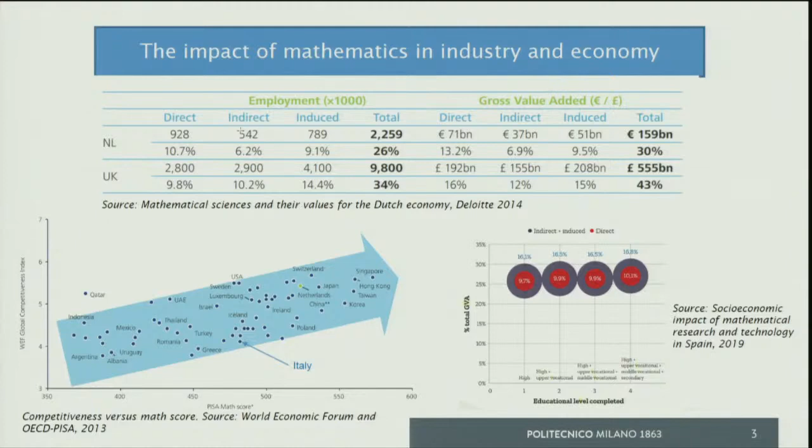You can see that the percentage is quite high. If you look at the total, mathematically induced activity can be responsible for up to 30 or 43% of the gross value added of the country. Similar results you can see in the other table in the lower right, where we have the Spanish findings, and surprisingly, even if Spain is quite different from the UK and the Netherlands, the numbers are more or less comparable to those of the Netherlands, while the UK is a more technological society, and you can see it also in these numbers.

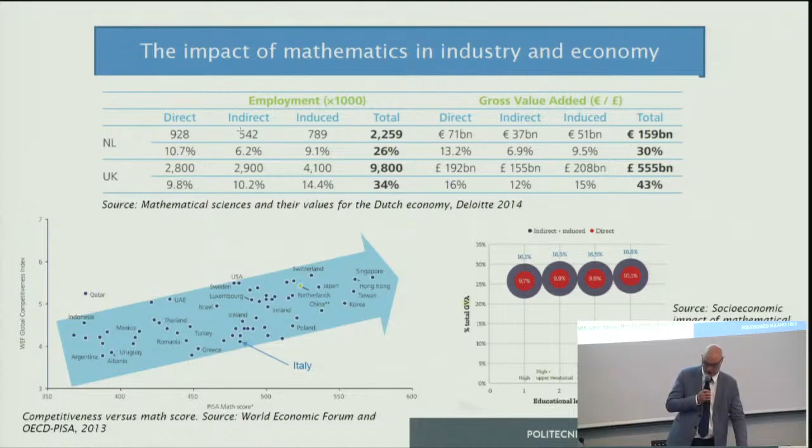On the lower left part, I just wanted to mention the relation between the competitiveness of a country and the knowledge of mathematics, as measured by the OECD's PISA score, in 2013, the year this analysis was made. As you can see, there is quite a reasonable statistical correlation, at least, between the two quantities. Unfortunately, Italy, I put an arrow to indicate where it is, is not very well placed. So this is just to show you that mathematics is of course science, but not only science. It has a very strong impact on the modern economy.

Let's see, in our experience towards industry, which were the main challenges for the numerical modeller we were called to face. I put the main keywords, the main aspects. First of all, multiphysics. Nowadays in industry it is very important to integrate tools that were in the past developed to solve single aspects: structural analysis, fluid dynamics, thermal analysis, or whatever. Now the focus is always on integration, on tackling multiphysics phenomena. Optimization is another very big keyword that we have met in many of our projects.

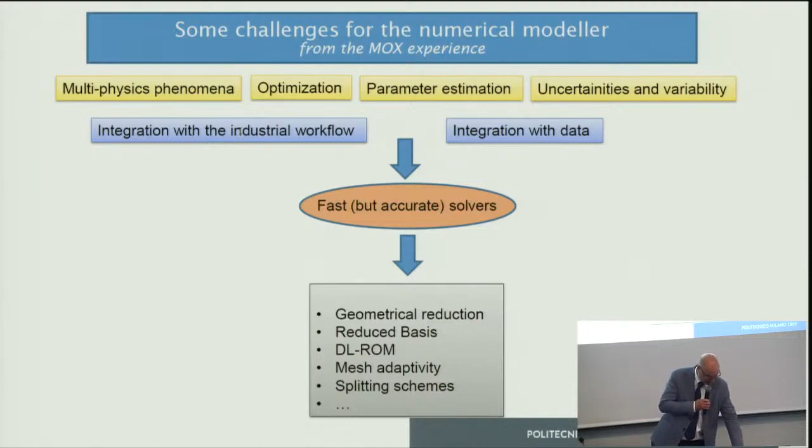It is not only important to develop accurate algorithms, you also need to find a way to perform in a time that is compatible with the industrial workflow. And so here I just show some showcases, as Pier Cesare did before, on some of our projects. This is a work related to energy transition, because we are moving very much to alternative sources of energy.

One is wind. Exploiting wind, offshore wind plants, you need cables to transfer the energy from the turbines to the grid, and we have to face how to build those cables so that the power losses are minimized. That was the industrial objective: find the optimal cable configuration to reduce power losses due to eddy currents and hysteresis.

One possibility is to go to a 3D standard magnetostatic simulation of the cable, but that would require an incredible amount of time if you have to study different processes, different scenarios, or if you want to implement some optimization strategy. So the answer here was a 1D reduced model for the wire and a special integral formulation of the problem, and moreover, exploiting some symmetries of the problem to develop very fast and parallel solvers.

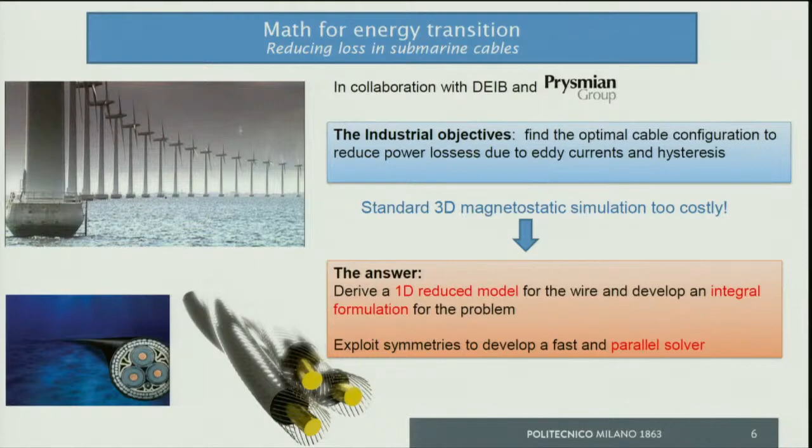And here is a picture just to show some elements of the model reduction. I'm not going into the details, but what I want to point out is the picture on the right, where you can see that with this new model we were able to get results with an accuracy sufficient for the industrial purposes, but with a 4 orders of magnitude gain with respect to a standard finite element solution.

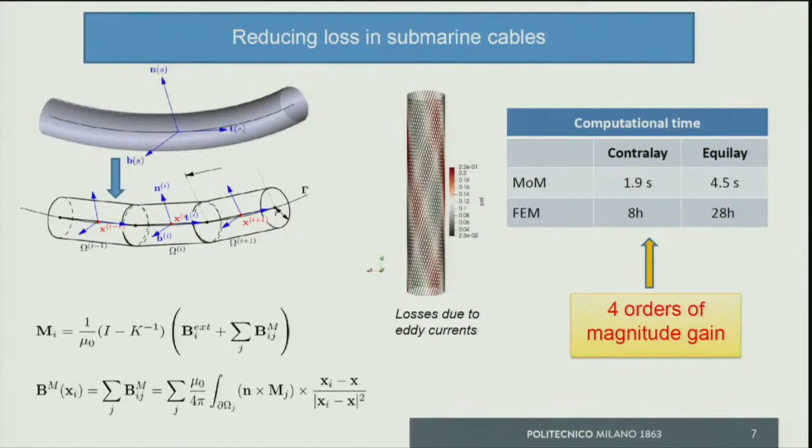Another aspect where model reduction, in a different sense, is present is the work done in collaboration with Thales Alenia Space on topology optimization for additive manufacturing. Topology optimization is to find the best allocation of material inside a design domain to optimize a quantity of interest, for instance, the resistance of the object for the application at hand.

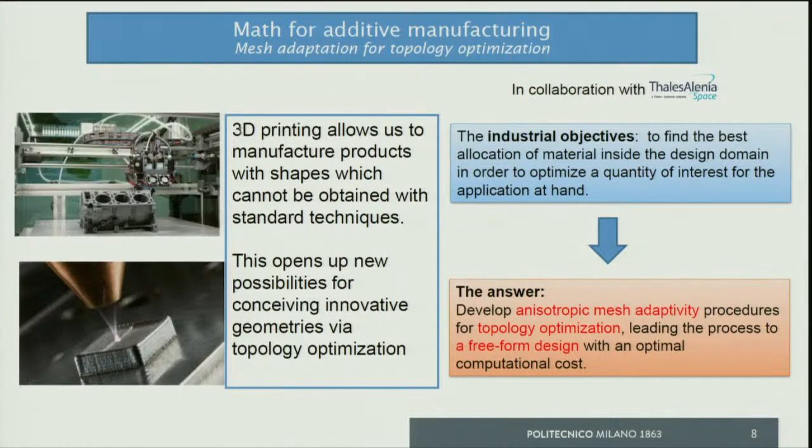The interest in topology optimization is increasing a lot because of the possibilities given by 3D printing. 3D printing allows us to print shapes that before were not possible to generate, so the importance of topology optimization is growing. However, topology optimization is a lengthy process, and here the study concentrated on using a particular type of mesh adaptivity, anisotropic mesh adaptivity, to improve the topology optimization process, reducing at the same time the computational cost.

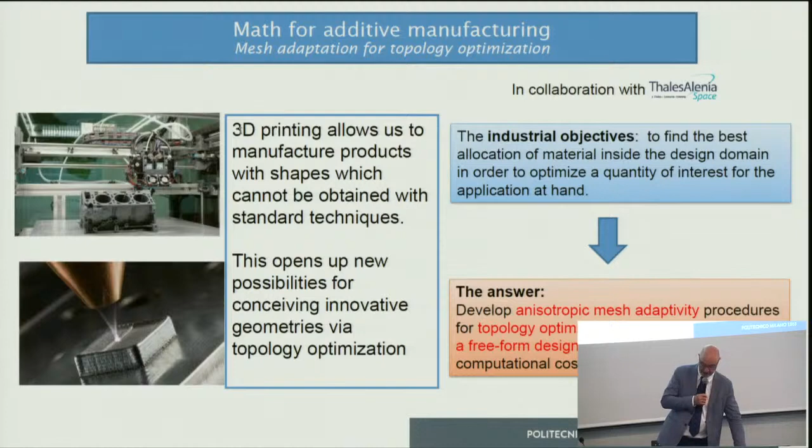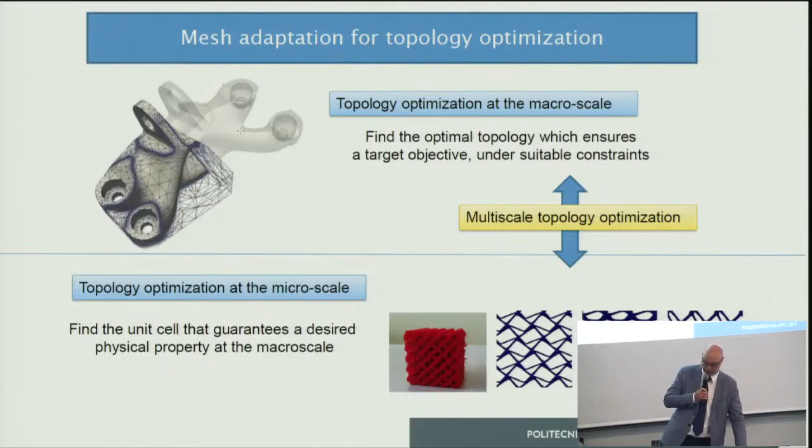Topology optimization can also be done at the micro scale, not for designing the final piece, the final object, but to find the best microstructure to guarantee certain mechanical characteristics. And also here, mesh optimization can help.

We worked a lot in collaboration with Eni, the Italian oil company, on math for energy, for the exploitation of energy resources. If we want a sustainable economy, not only do we need to find new energies, but also to better exploit the traditional energy resources. And one important issue is to take into account fractures.

Subsoil is fractured. Fractures can appear at very different length scales, from faults at a very big scale, down to very small fractures, and they are ubiquitous. If you want to exploit the subsoil correctly, you need to take into account the fractures. This is true not only for hydrocarbon extraction, but also for geothermal exploitation or for CO2 storage facilities.

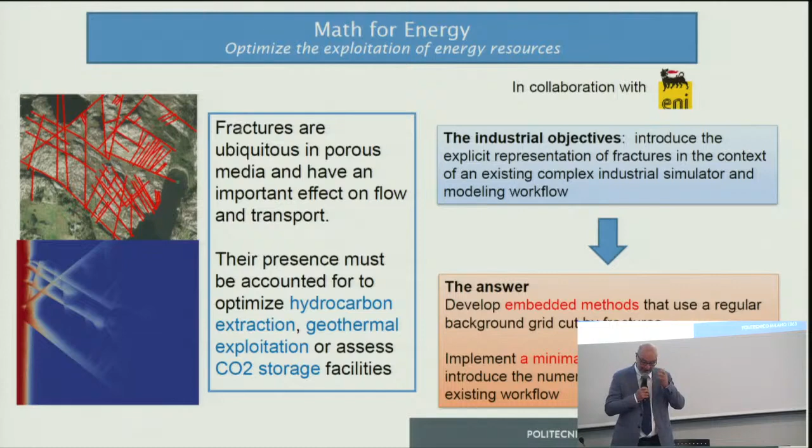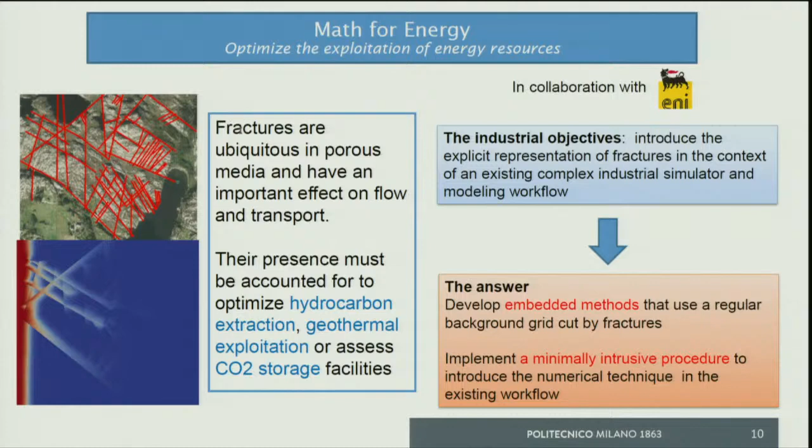Taking into account fractures is not so easy, because the biggest fracture at least must be explicitly represented inside your domain. The company wanted an answer that could be used directly in their workflow. So the idea was to develop embedded methods that did not require the company to change their code, but that could be integrated directly in their simulation tool, giving the effect of the presence of the fracture.

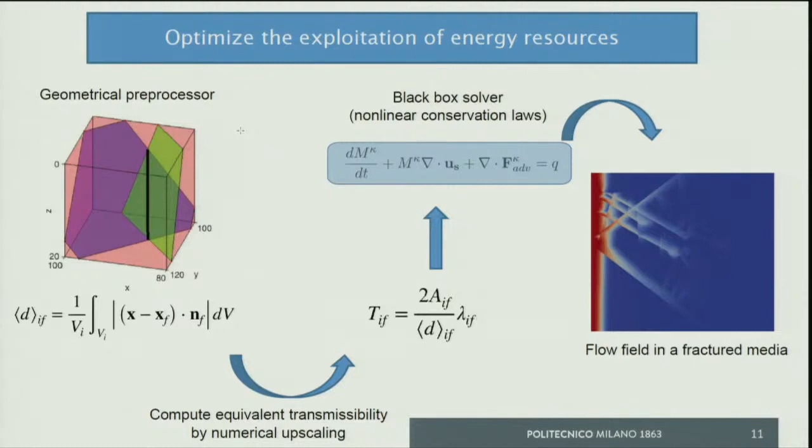This has been done by developing an offline type of activity that consists in analyzing the network, computing all the intersections, all the properties of the material, and so on. The result is to create what they call transmissibilities, which are implemented inside the black box solver of the company, modifying the parameters inside the solver to take into account the presence of the fracture. You can see how this has been obtained in the picture, where we show some simulation.

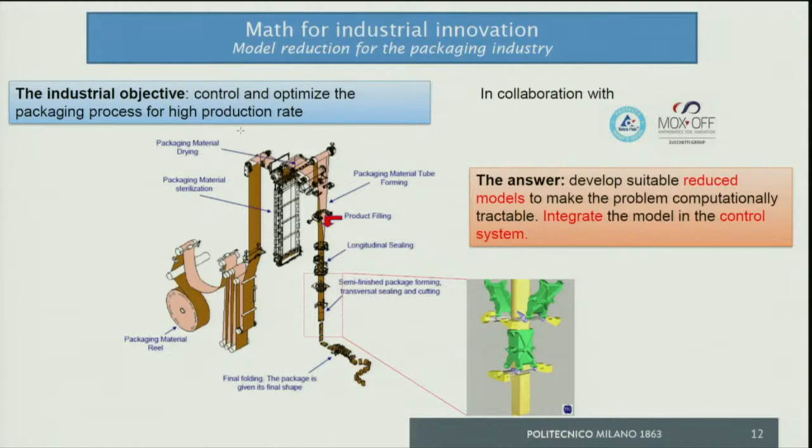This is the final showcase: model reduction for the packaging industry, in collaboration with Tetra Pak and MOX-OFF. You will have a presentation soon by the MOX-OFF CEO. Here again, we have a complex fluid structure interaction problem, for making the package that contains the liquid material, milk or whatever.

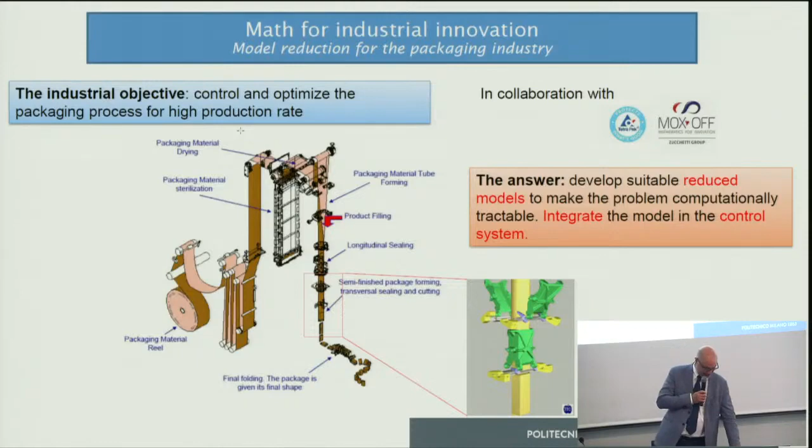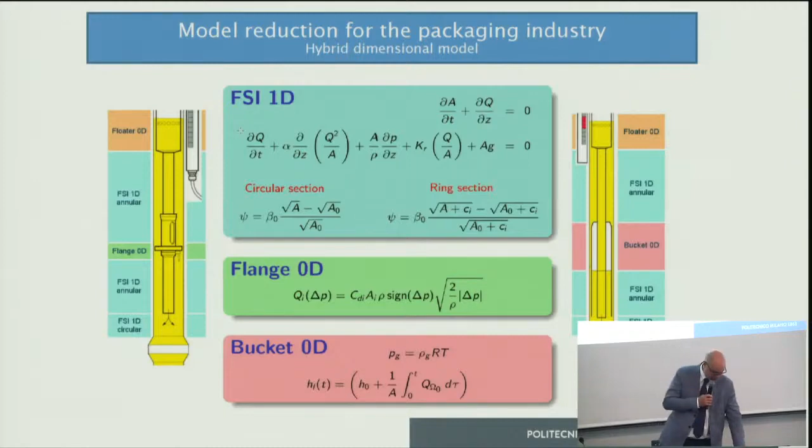Here the answer was to develop both reduced models, physics reduced models, like you see here, treating the different components with 1D or 0D models, but also, more recently, for the more complex parts where you really need a detailed description of the flow field, to use...

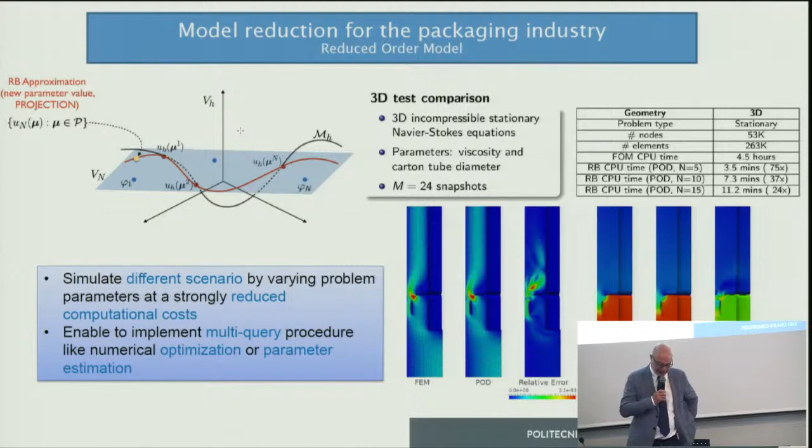...reduced order modeling, which consists in trying to represent the manifold of solutions with respect to the problem parameters. Once you have obtained this map with an offline activity, you have a very fast solver to represent also complex phenomena, like fluid inside that type of geometry.

What is the next challenge? In my opinion, the next challenge is integrating data in physics-based simulations. This is just a reduction, let's say, of the general view that Alfio gave in his presentation.

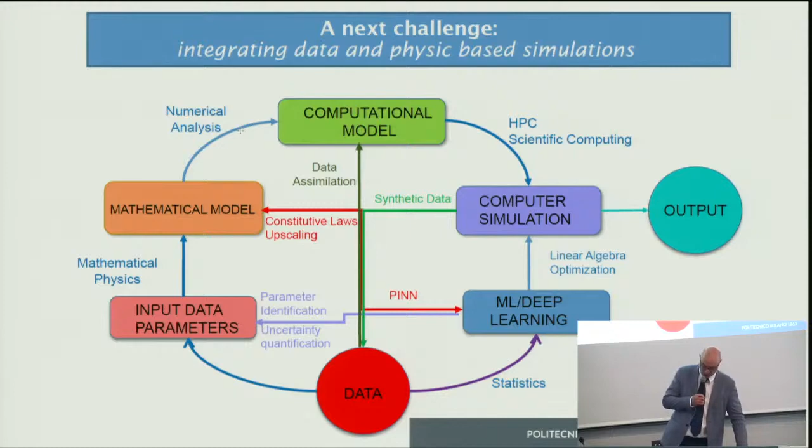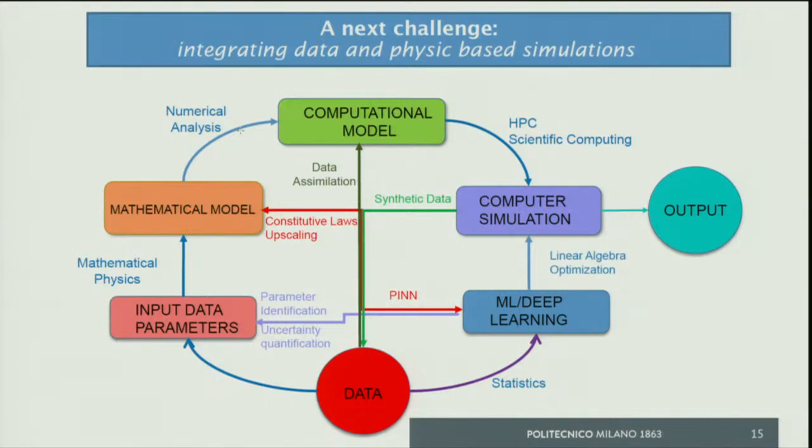So the integration of these two worlds, I think, will be the key for the next activity in collaboration with industry, because industry is producing a lot of data now with sensors, and they sometimes don't really know what to do with that data, but they also have a lot of background knowledge integrated in computer codes. The important thing is to take advantage of the existing knowledge and exploit the new possibilities given by the big data revolution.

So this is just to draw the conclusion I've already told: mathematical tools and computational techniques may improve industrial project and production, provided they can be integrated in the industrial workflow, and that often requires a lot of ingenuity and careful selection of the appropriate technique, the appropriate algorithm. The integration of physics-based and data-driven models is an important challenge for the future.

Finally, I want to mention that all of this requires an interdisciplinary attitude that can be found in MOX, and this is also a prerequisite for all the activity we have done in the past, and the one we are going to do in the next 20 years. Thank you.